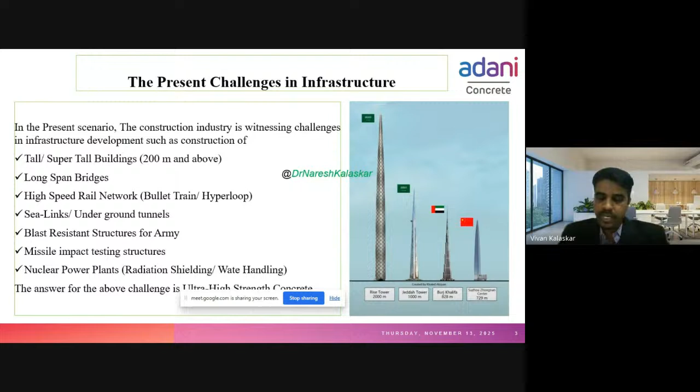So if you see, I'm taking Hyderabad as an example. If you see in Hyderabad, we have reached up to 60-story building construction, super tall building construction we have reached. So this is becoming very common.

If you see in Delhi, if you see in Mumbai, tall and super tall buildings and high span structures and hyperloop and many structures, the infrastructures are throwing a challenge to civil engineers. So for this, we need an exceptional material, which is ultra high performance concrete.

So in this presentation, we are going to discuss about ultra high performance concrete, how to reduce its cost, and how to use the local available materials, and how to make an exceptional concrete which will give excellent durability aspects. So what does UHPC give if you compare with normal concrete?

UHPC is a cementitious composite. It will give enhanced strength. If you see normal concrete, it will give up to M60, M70, M80. But in ultra high performance concrete, from starting M100 to up to M200, we can reach, and long-term durability.

If you compare with normal concrete, UHPC gives exceptional durability aspects. In this presentation, we are also going to discuss about the durability aspects at the end of the presentation. And one of the important properties of UHPC is tensile ductility. It is an excellent tensile ductility material.

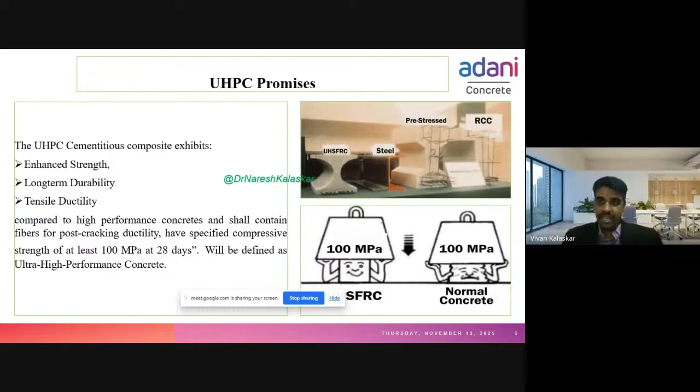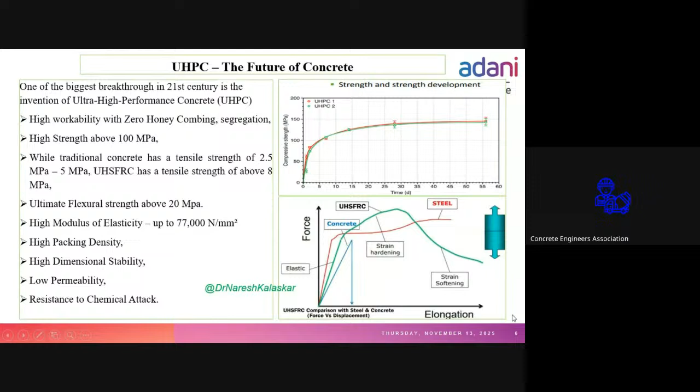Thank you. Okay, the future of concrete. If you see the future of concrete, now we are in 2025 and we are using up to M80 normal concrete. If you see the future of concrete in the 21st century, ultra high performance concrete will be the future, because of high workability with zero honeycombing, there will be no honeycombing and segregation in UHPC.

Minimum compressive strength will be M100. And traditional concrete tensile strength comes around 2.5 to 5 MPa, but in ultra high performance concrete, minimum tensile strength we can get is 8 MPa, and ultimate flexural strength about 20 MPa, and modulus of elasticity 77,000 Newton per square millimeter.

So the main principle of this material is high packing density. If you design the material like that, making perfect packing density and low permeability, you will definitely get an excellent material, and it will also resist chemical attack, which is one of the important durability aspects.

You can see in this graph, we have compared UHPC, normal concrete, and steel. You can see the UHPC comparison with steel and concrete, force versus displacement.

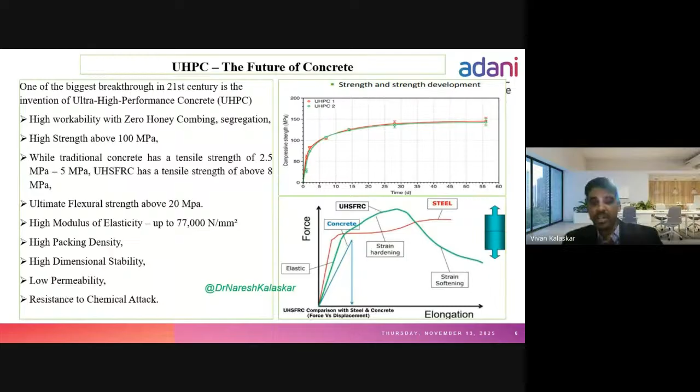Unique features, as I've told, with UHPC we can reduce the overall weight of the structure, and negligible low reinforcement steel, and low maintenance cost, and sleek and elegant looks, and ultra high wear and impact resistance. And we can get within 24 hours up to 60 MPa compressive strength. Within 3 days, we can reach up to 100 MPa compressive strength.

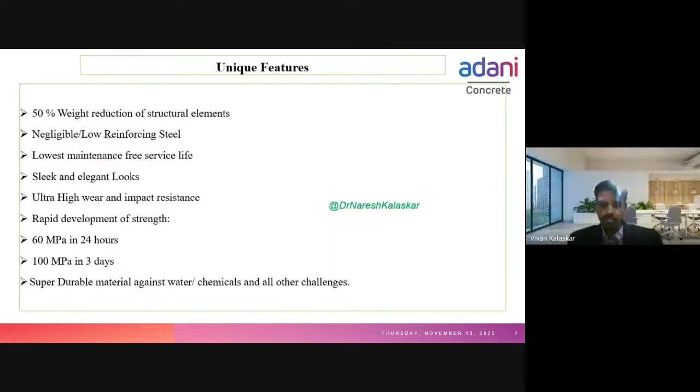The principle of mix combination of UHPC, now I'm sharing with you. There are 4 basic important mixed combination principles. One is in UHPC we have powder and fine materials. Second is superplasticizers. Third is fibers, and fourth is water.

If you take the powders, we are using ordinary Portland cement, quartz sand, fine silica sand, and ultrafine GGBS as the powders. Superplasticizers are very important for ultra high performance concrete, because in normal concrete we used to take a water cement ratio of 0.4 or 0.3, but in UHPC we have to bring down the water cement ratio to up to 0.15. So to get the proper fresh properties of concrete, we need an excellent superplasticizer, which plays a major role in UHPC.

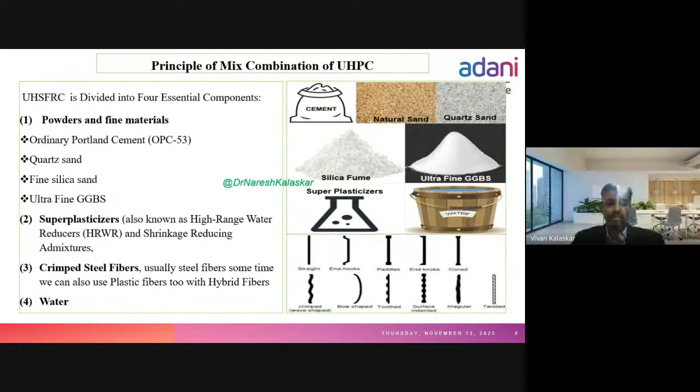Crimped steel fibers are very useful and very important in UHPC, because in this high strength concrete there will be a lot of shrinkage, and crimped steel fibers reduce the shrinkage. It will also improve the flexural behavior. So crimped steel fibers play a major role, and water is also very important to make the mix.

The main principle of UHPC is that there will be no coarse aggregate in the mix. Usually we add 20 mm and 10 mm aggregate in normal concrete, but in the Indian UHPC which we have designed, we have used 2.36 mm as the maximum size of aggregate.

The second principle is higher packing density and no weak layers, and steel fibers, which I told you, improve ductility in UHPC and also reduce shrinkage. These are the main mixed combinations of UHPC.

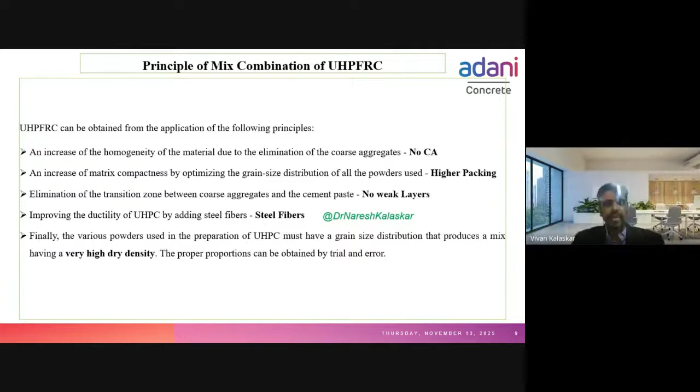The principles of mixed combination of UHPC, of course.

In this UHPC, we are using cement as a binder. If you use more binder, we will face the heat of hydration. So here we are replacing the binder with cementitious materials like silica fume, ultrafine GGBS, and fly ash. These are the options.

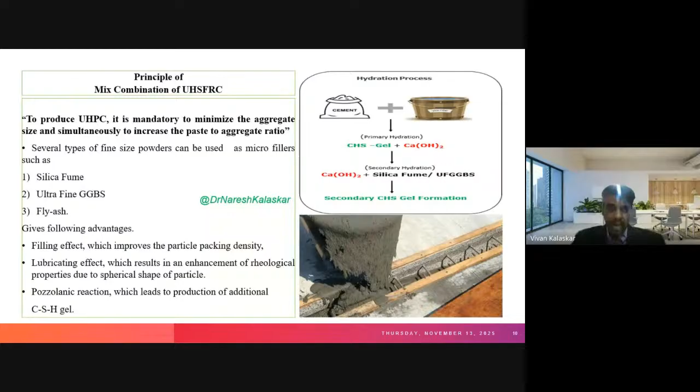If you see the hydration process, when you take ordinary Portland cement, primary hydration will start and 70% of lime will be hydrated with water, and another 30% of lime will not be hydrated. That will be hydrated with cementitious materials.

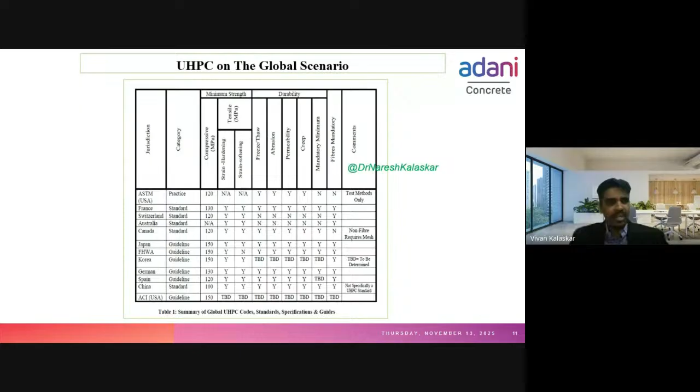If you see the UHPC global scenario, in India we don't have any UHPC code, but in every country they have defined UHPC differently. In China, they have defined UHPC as a minimum compressive strength of 100 MPa. In Canada, they have defined UHPC as 120 MPa minimum compressive strength. If you take the ACI code, they have defined 150 MPa as the minimum strength for UHPC.

In India, we don't have any UHPC code, and we have guidelines only up to M80. That is the reason in this research we have developed UHPC from M80 to M150, to bridge the gap from the Indian standard M80, M90. That's the reason M80 and M90 also we have designed in this total project.

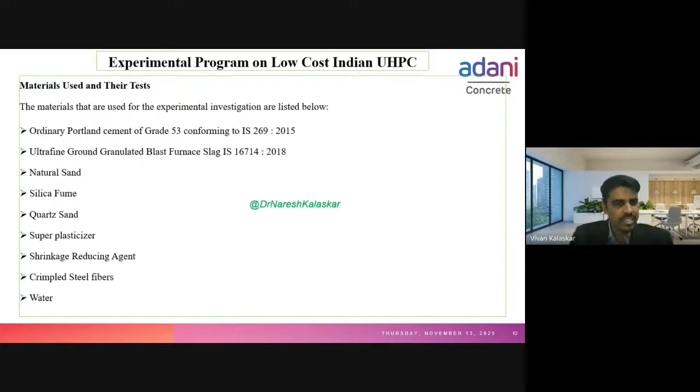These are the materials used in the mix design: ordinary Portland cement, ultrafine ground granulated blast furnace slag, natural sand, silica fume (which has been tested but not used in the concrete), quartz sand, superplasticizers, shrinkage reducing agent, crimped steel fiber, and water.

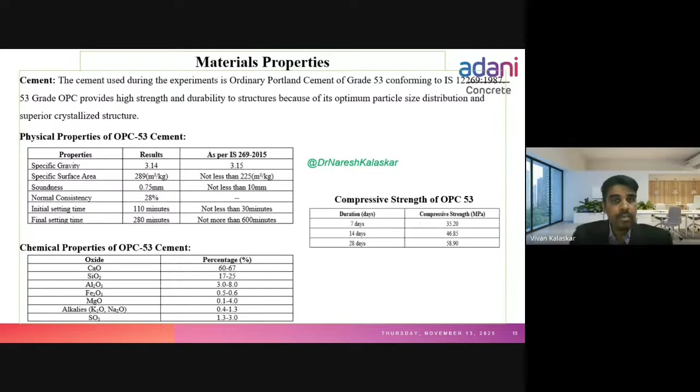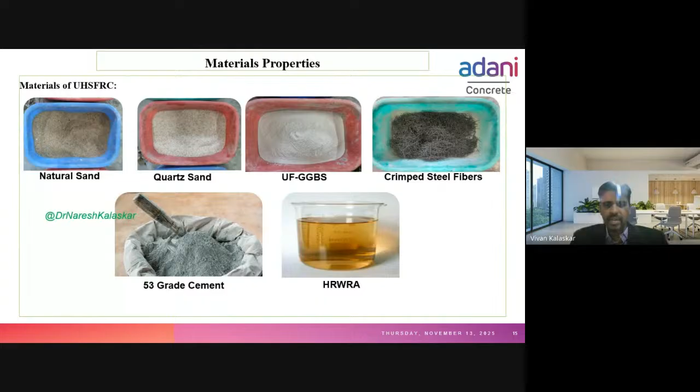Ultrafine GGBS, so we can say Alcofine. In Ambuja, we are manufacturing Alcofine. It's nothing but ultrafine GGBS. These are the properties of ultrafine GGBS.

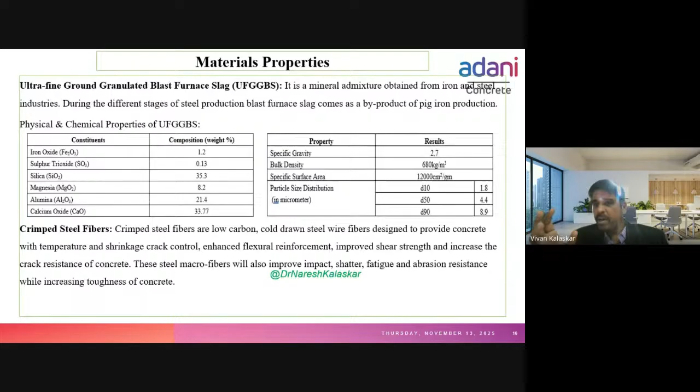You can see the specific surface area, 12,000 centimeters square per gram. It's one of the beautiful things this material has, so that we can reduce more voids. We can improve the packing density, and we can make the concrete more non-porous. Crimped steel fibers.

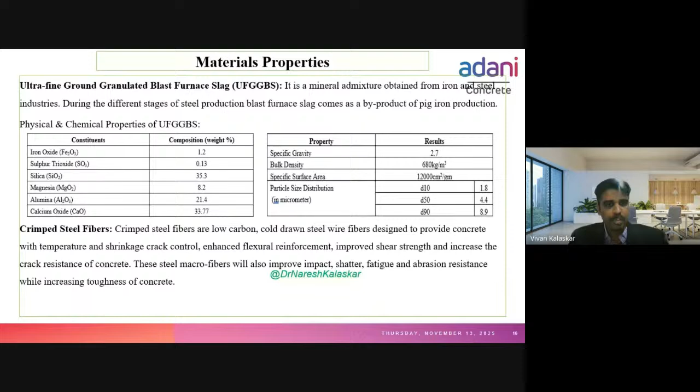The crimped steel fiber density is 7,800 kg per meter cube. The aspect ratio is one of the important points in UHPC for fibers. The aspect ratio used in this design is 42.3. Aspect ratio is nothing but L by D, the length and diameter of the fiber.

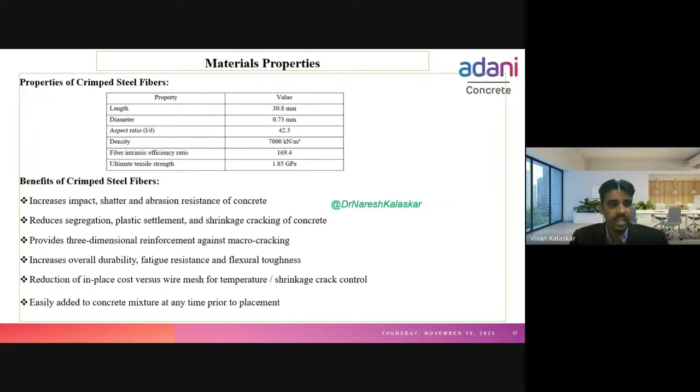Crimped steel fibers definitely reduce shrinkage, improve the flexural behavior, and result in reduction in in-place cost, replacing various wire mesh used for temperature and shrinkage control. These are some important benefits of crimped steel fibers.

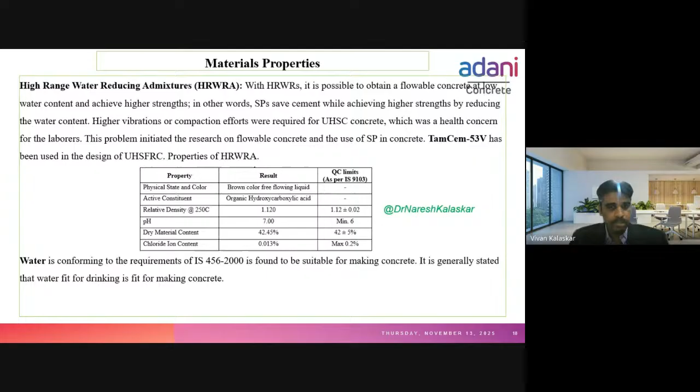High range water reducing agent. We have used TamCem-53V high range water reducing agent. Water as per Indian standard - drinking water we have used.

So is UHPC expensive, or is imported silica fume required in UHPC? Most designs, if you see foreign countries' UHPC designs, use a lot of silica fume. Silica fume is an imported material, and it is very, very expensive. So is it required to design UHPC with silica fume? In the coming slides, we are going to discuss how silica fume behaves when you use more quantity.

We did a small experimental study where we created mortar cubes. In these mortar cubes, we replaced 10% of the cement with ultrafine GGBS, and 10% with silica fume. As you may know how to test mortar cubes per Indian standard - like testing for cement grade with 200 grams of cement and 600 grams of Indian standard sand. We add the cement and test the compressive strength. We did the same study here.

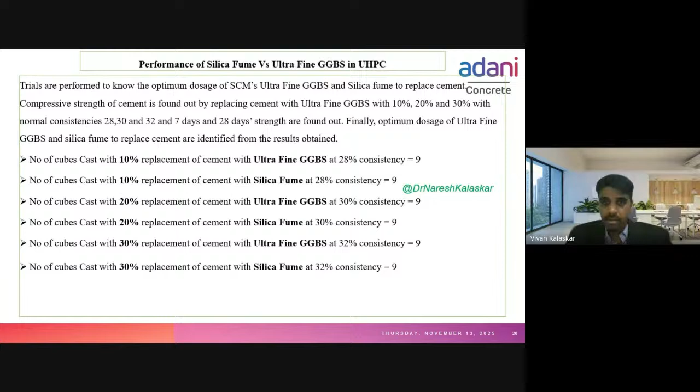We replaced cement with ultrafine GGBS and silica fume at 10%, 20%, and 30%. After mixing, we cast mortar cubes and tested them at 3 days, 7 days, and 28 days. These are the results we got.

When we added 10% silica fume, we got 46 MPa compressive strength. When we increased silica fume to 20%, the 28-day compressive strength drastically dropped to around 16.7 MPa. When we added 30% silica fume, the 28-day compressive strength drastically dropped to 8.5 MPa. So as you increase silica fume content from 10% to 20% to 30%, the strength keeps coming down.

But when using ultrafine GGBS, replacing 10% of cement, you get 59.9 MPa strength. Increasing to 20% ultrafine GGBS, you get 63.04 MPa compressive strength. Replacing 30% of cement with ultrafine GGBS, you get 72.3 MPa compressive strength.

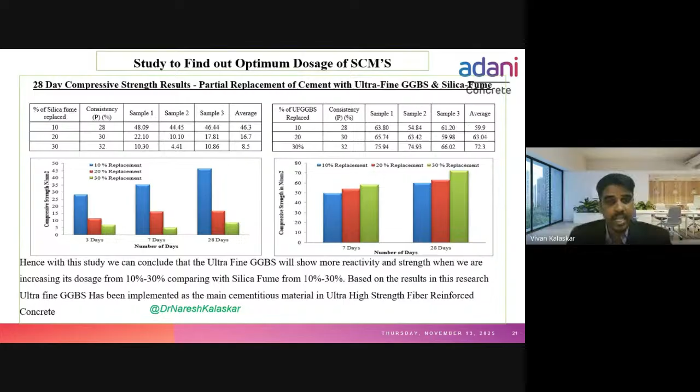So from this study, we can clearly understand that silica fume is not suitable for ultra high performance concrete, and it's also a high-cost imported material. Ultrafine GGBS is abundantly available in India. We can use this material up to 30% in UHPC, reduce the cost, and improve the performance of the mix.

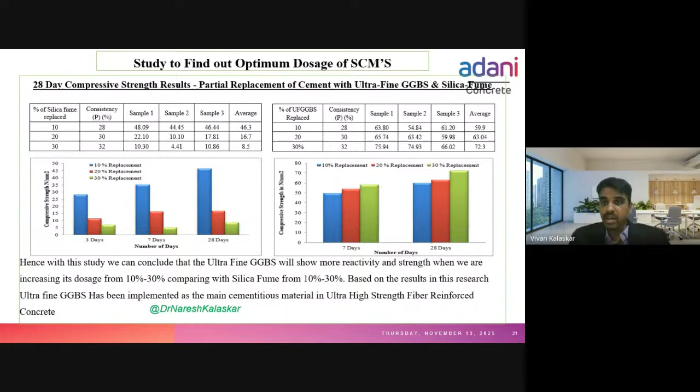When mixing, first you add cement and fine powder material like quartz sand. After that, add the remaining powder material - silica sand and whatever other cementitious materials you have - and mix it in dry condition. After mixing thoroughly in dry condition, add the water, and after adding the total water, mix for 3 minutes.

After mixing for 3 minutes, slowly add the admixture - you should not add it all at once. You have to observe how the mix is behaving as you add the admixture. The total procedure takes 7 to 10 minutes. While adding water simultaneously, you also have to add the steel fibers.

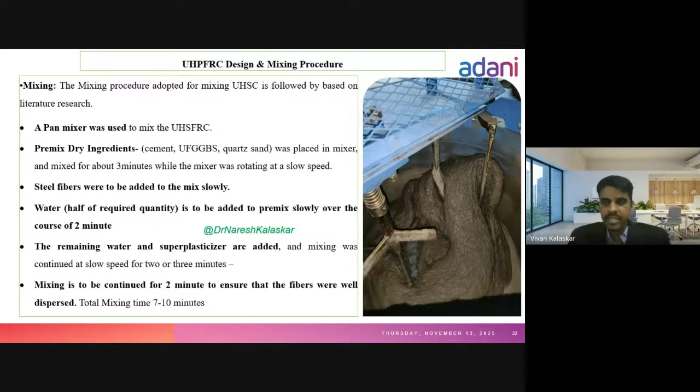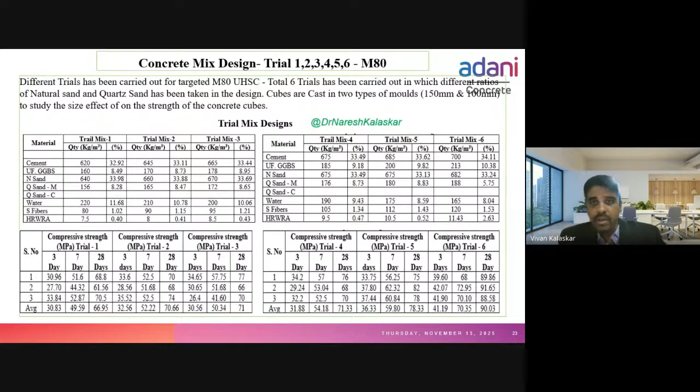So you can see here in this trial mixing, we are same just like we have done a previous experiment. We are increasing.

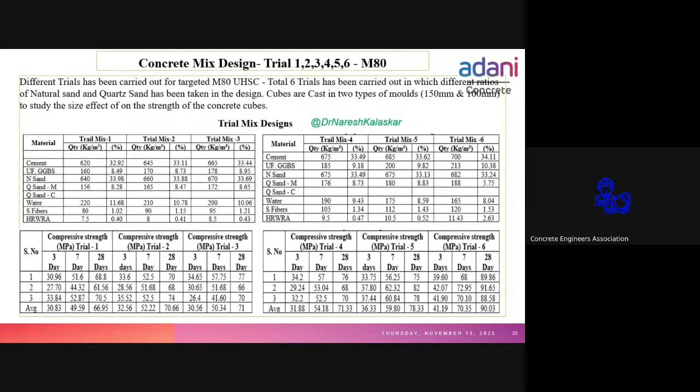आए हैं क्या? ठीक है, मैं आता हूँ फिर आधे घंटे। Mr. Sunil, please keep yourself on mute. के करीब आता हूँ मैं आपके पास। Thank you. Hello.

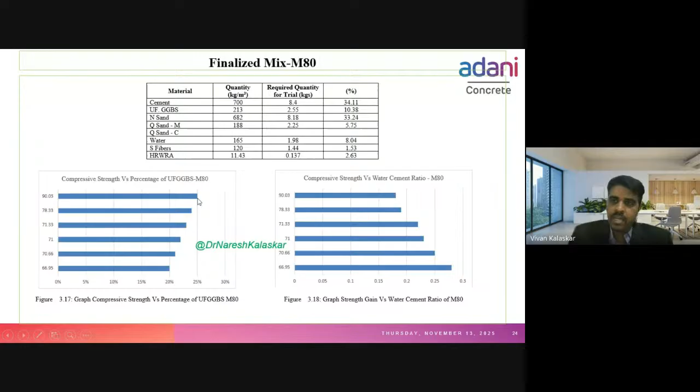If you see the graph trend, when you are increasing the ultrafine GGBS content, your compressive strength is going up. When we used ultrafine GGBS 20%, our compressive strength was 66.95. When using ultrafine GGBS 25%, our compressive strength was 90 MPa. So ultrafine GGBS or alcofine is an excellent cement replacement for UHPC.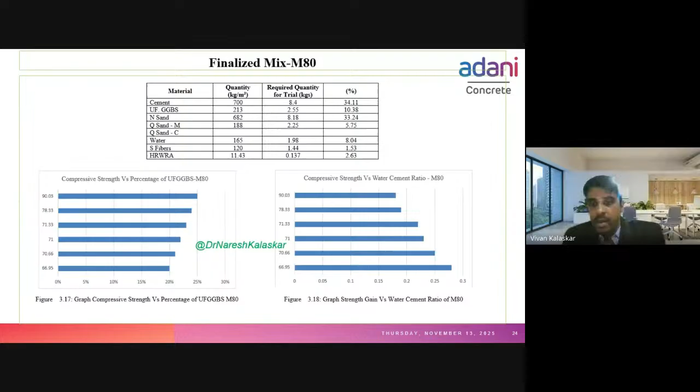This is M80, and you can see the water cement ratio here. When you increase the water cement ratio from 0.28, you got M80 strength of 66.95. When you reduce the water cement ratio, like for M80 we used 0.18 water cement ratio, you got 90 MPa strength.

So in this graph, I want to say that ultrafine GGBS content and water cement ratio matter: when you increase ultrafine GGBS, you get more strength, and when you reduce the water cement ratio, you get more strength. These are very important factors to keep in mind while designing UHPC. So low water, higher good quality binder, and supplementary cementitious materials are important.

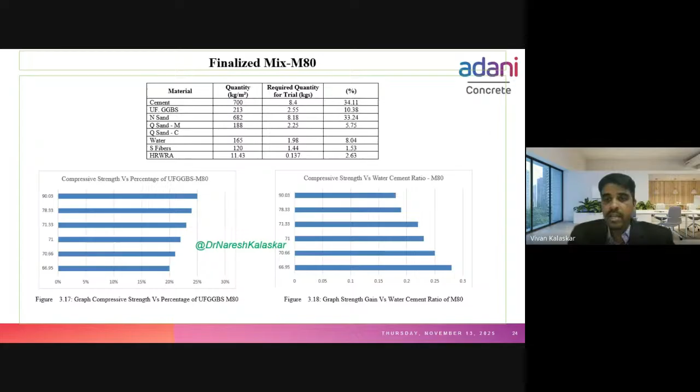As you know, in India, in Indian standard, we have standard deviation specified only up to M80, for normal concrete only. For all higher grade concretes, the code has specified only 5 standard deviation. So for M80, we have also calculated the standard deviation for all these mixes, and we established the standard deviation as 5.56 for M80.

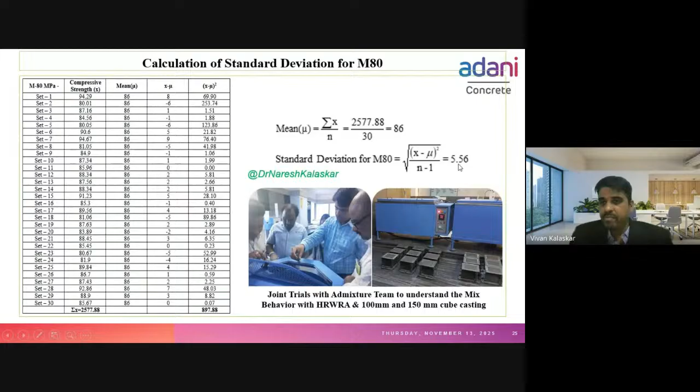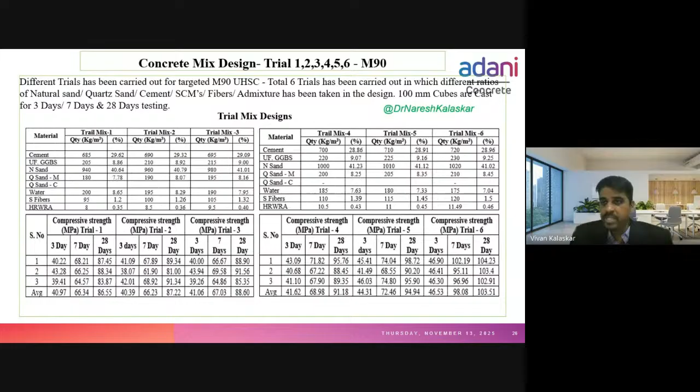This is M100. In M100 also we have used quartz sand and natural sand. In this design, we have reduced the natural sand content and used quartz sand. When we used finer quartz sand, we got 112 MPa compressive strength for M100. The standard deviation established for M100 is 6.12. These standard deviations can be used because we have done extensive trials for these mixes and established these standard deviations - around 30 sets we have tested for each standard deviation calculation.

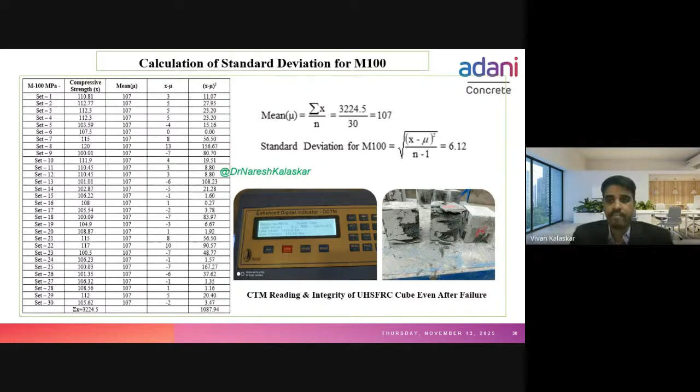This is for M110. The compressive strength has been seen as 122 MPa.

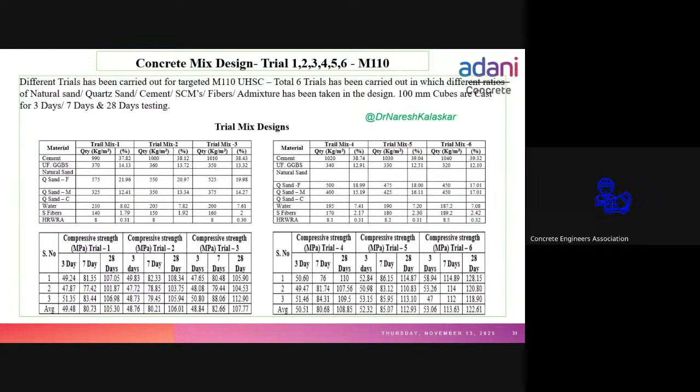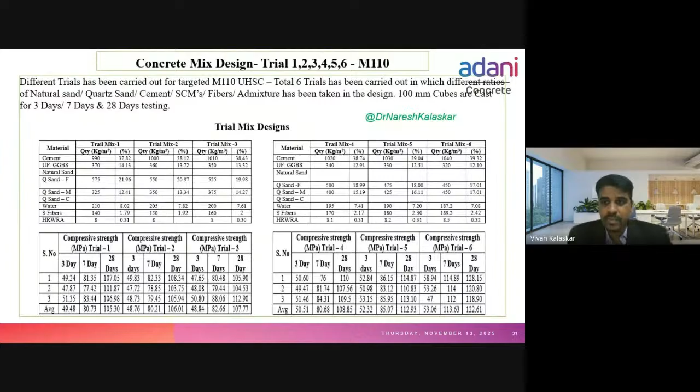In this M110, we have totally omitted natural sand and taken quartz sand - finer quartz sand and medium quartz sand. When we omitted total natural sand and took only quartz sand, we got a compressive strength of 122.61 for M110, and we established a standard deviation for this mix of 6.26.

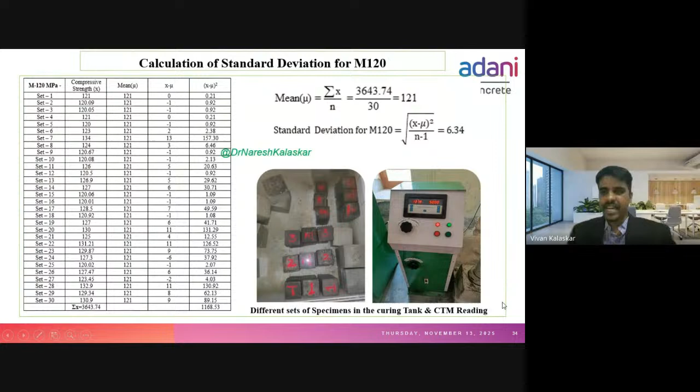This is M120, and the strength has been - you can see here, in the previous mix we used finer quartz sand. In this mix we used medium quartz sand and coarser quartz sand. Finer quartz sand has been omitted, and only medium quartz sand was used. When we used only medium quartz sand and also omitted natural sand, we got 131.66 MPa for M120. The standard deviation for M120 is 6.34.

For M130, we got 142.09 compressive strength. In this mix, medium quartz sand has been used.

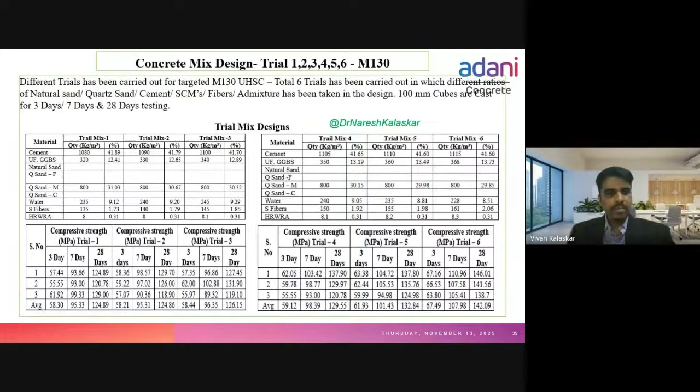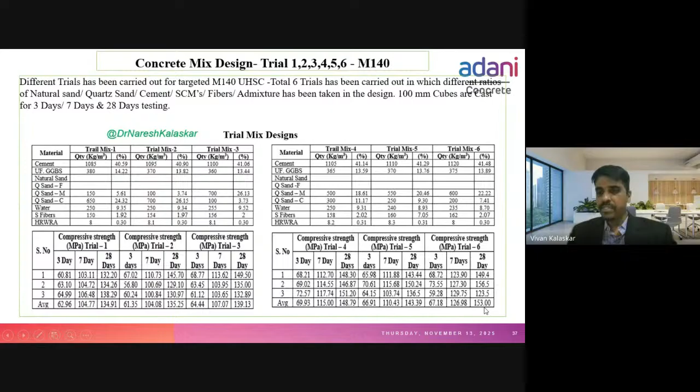When we used this, we got for M140, 153 MPa compressive strength. Are you observing the standard deviation is going up? When the compressive strength increases, automatically the standard deviation also increases. For M140, we got 7.23 standard deviation.

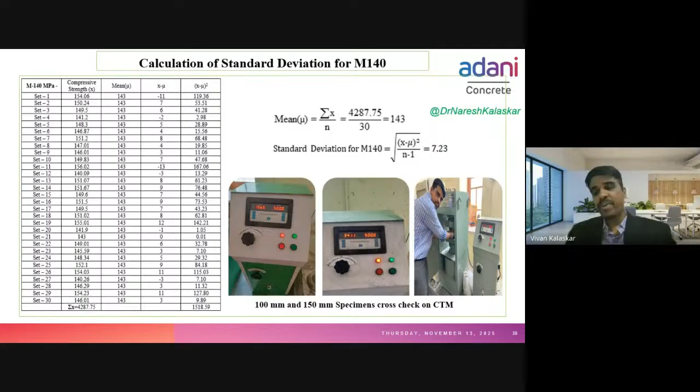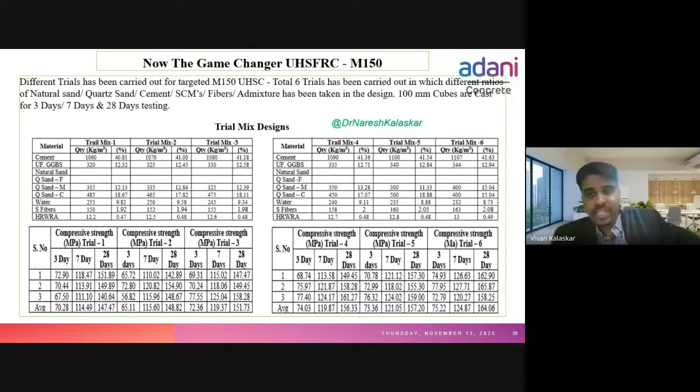This is M150. In M150, we have used medium quartz sand and coarser quartz sand. In trial 6, we have used 50-50% - medium quartz sand 50%, coarser quartz sand 50%. So what is happening here? The coarser quartz sand voids will be filled with medium quartz sand, the medium quartz sand voids will be filled with cement paste, and cement paste voids will be filled with ultrafine GGBS. So when you plan your total density matrix perfectly, then only you can achieve the perfect compressive strength.

In this M150, we got 164.06 compressive strength. So in this study, I have stopped till M150, and next I'm going to explain the M150 standard deviation, which is 7.82.

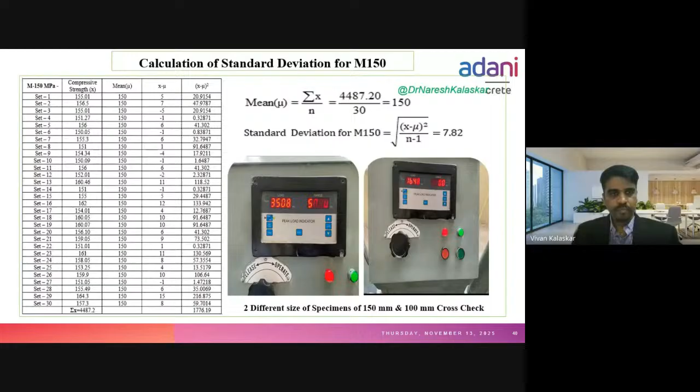Here's a small video of the mix, showing how the fresh properties of this mix look.

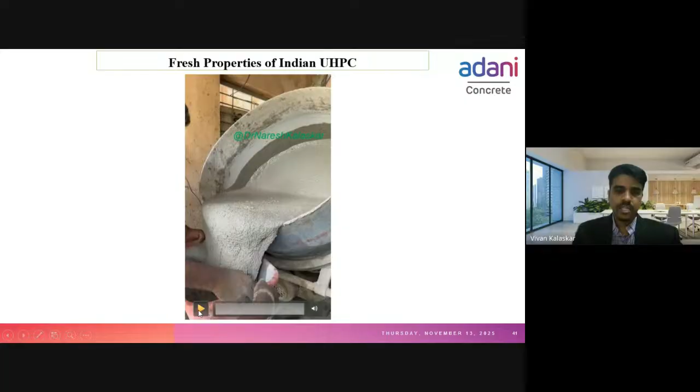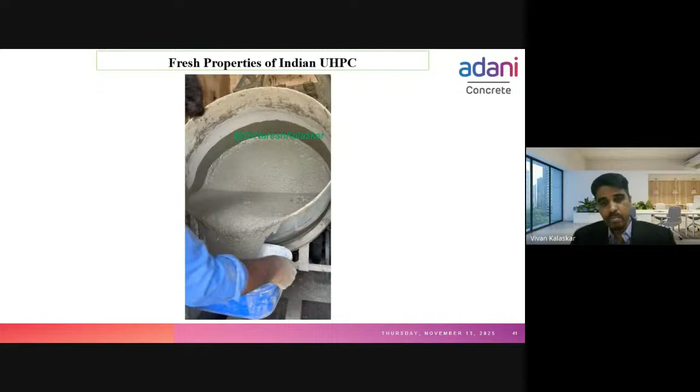Can you imagine what will be the water cement ratio for this? This is M150, water cement ratio is 0.14. At 0.14 water cement ratio, the mix is flowing like anything.

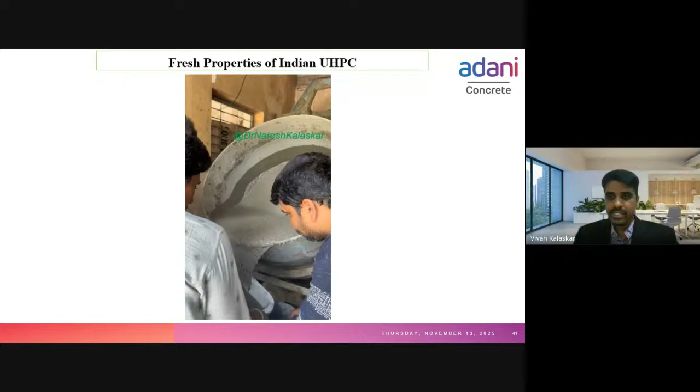We can make it pumpable also, just by correcting the admixture dosages. So usually UHPC will be poured like this only. If we need any pumping requirement, we can change the admixture dosages and get the mix required fresh properties of concrete.

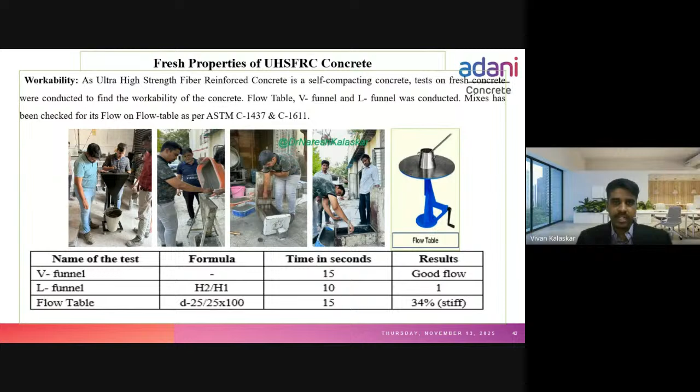These are a few fresh properties of concrete tests we have done - workability test, V funnel test, L funnel test, flow table test. Flow was good, L funnel result was 10 seconds, and flow table was 15 seconds. These are the fresh properties of concrete testing as per ASTM C1437 and C1611.

We have done one more study on this UHPC, because usually in southern India, I did my research in a university laboratory where we only had a 3000 kN compressive testing machine. For testing an M150 cube, we need a minimum 5000 kN machine if you are casting a 150 mm cube.

That is the reason I did one more point - I reduced the cube size. I took 100 mm cubes and also cast 150 mm cubes, and I took external lab support where a 5000 kN machine was available, and I did a study.

What will be the specimen size effect when you are reducing the size of the cube? What will be the effect on compressive strength? This is the study I have done.

So if you see, for the 100 mm cube, for the same mix design, when you reduce the cube size, the strength will increase. But for the same mix design, when you increase the cube size, the strength will be reduced.

With this study, I have established two multiplication factors which can be used in coming research. If you have cast a 150 mm cube of UHPC and want to convert those results into 100 mm, you have to use a multiplication factor of 1.05. Whatever compressive strength you get, multiply it by 1.05 to get the 100 mm cube result.

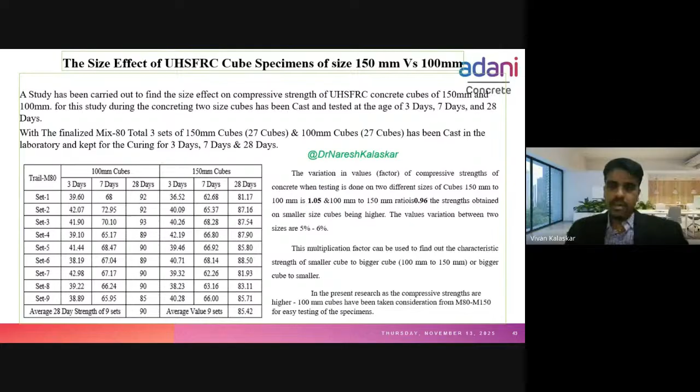If you have cast a 100 mm cube and want to convert it into a 150 mm cube, you have to use a multiplication factor of 0.96. So these are the multiplication factors you can use as per the requirements, and we have checked them against the target mean strength.

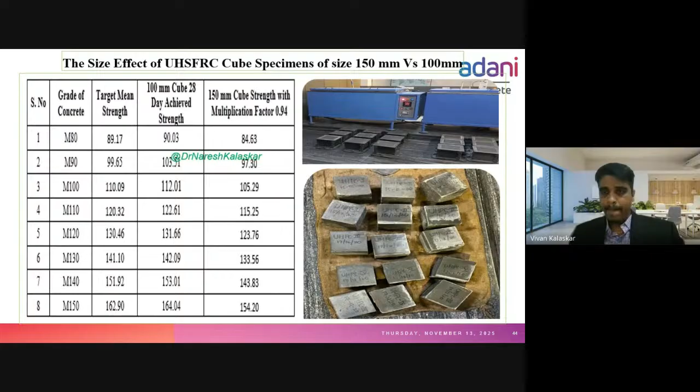Now, splitting tensile strength. A splitting tensile strength study has also been done. Let me explain.

For splitting tensile strength, we have a code formula: 0.398 under root FCK. If you take M80 and multiply with this theoretical formula, 0.398 under root FCK, the splitting tensile strength for a normal concrete will be 3.56 for M80. With this UHPC, we did a splitting tensile strength test and got 5.33.

If you take M150, splitting tensile strength as per the code formula gives 4.87, but we got 9.8 splitting tensile strength for M150.

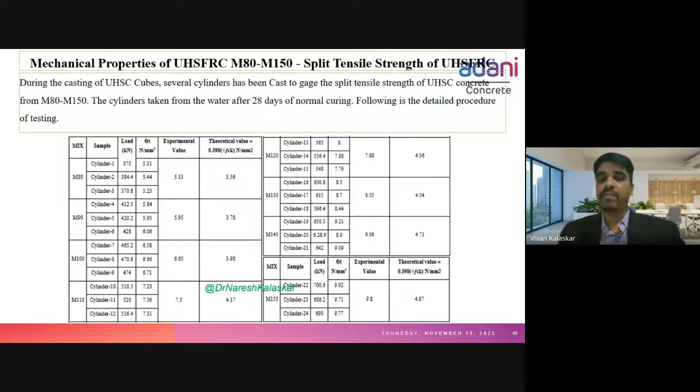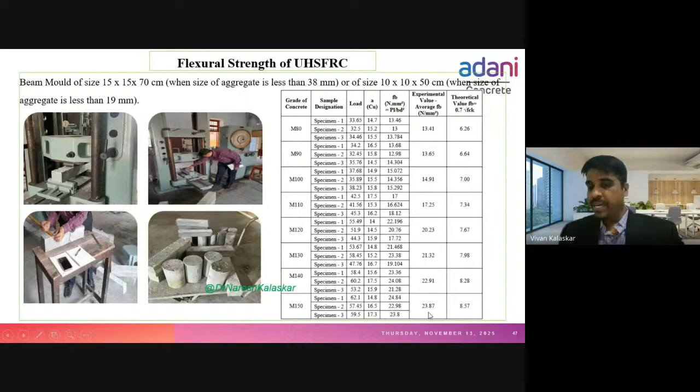This is the flexural strength we checked for UHPC on the Universal Testing Machine. For M80, as per code formula 0.7 under root FCK, the value should be 6.26, but we got 13.41. For M150, the code specified formula gives 8.57 flexural strength, but we got 23.87, which we can say is 24 MPa. So we can see the flexural behavior of ultra high performance concrete when comparing with code values.

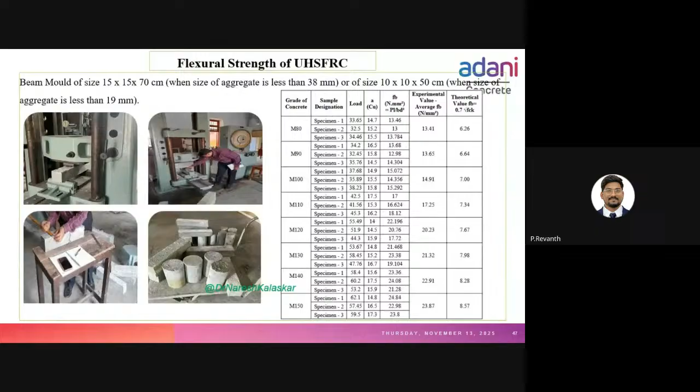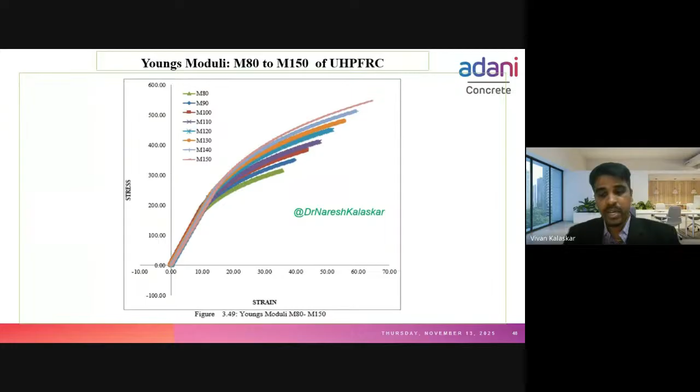Young's modulus is one of the important parameters for concrete. We have also tested Young's modulus, where we got 77 GPa for M150 concrete.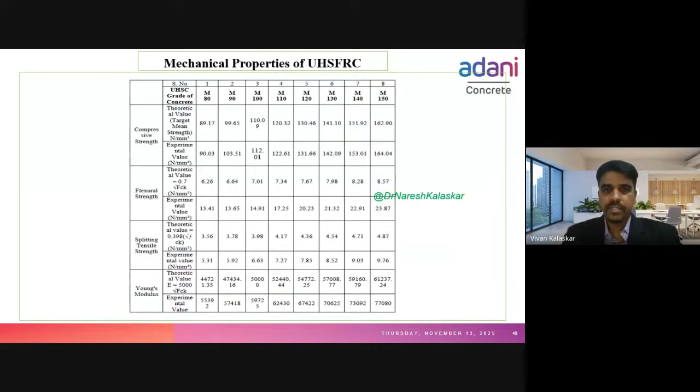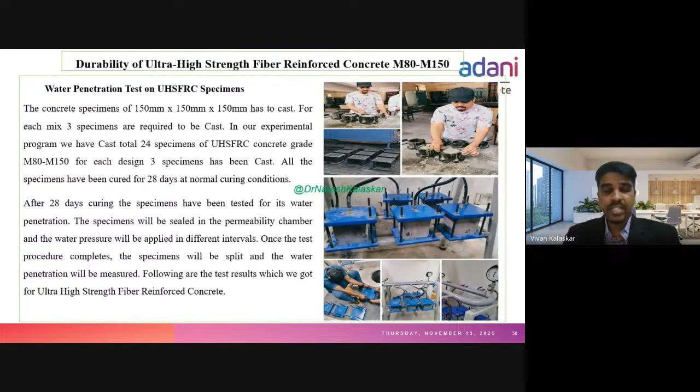These are the durability tests. I performed durability tests like water penetration test and chloride ion penetration test on UHPC specimens, and you will be surprised by the results. M150 has water penetration of 1 mm. As per IS code 16700:2017, foundation maximum water penetration should not exceed 15 mm, and for superstructures it should not exceed 20 mm. So for M150, we got only 1 mm water penetration.

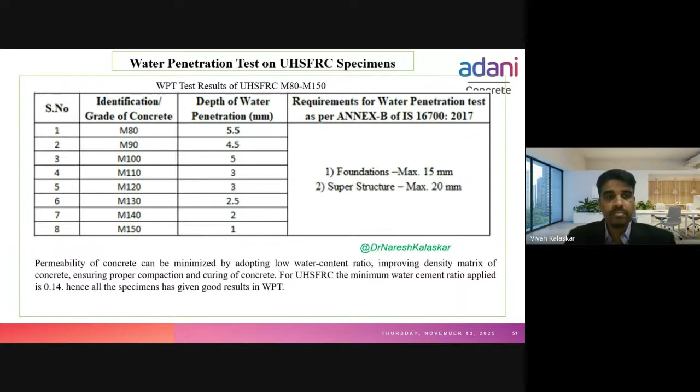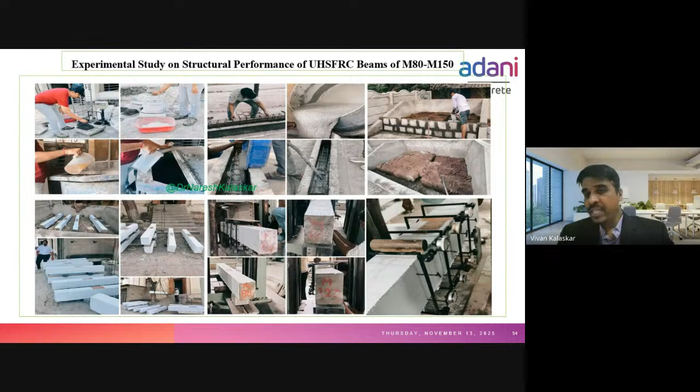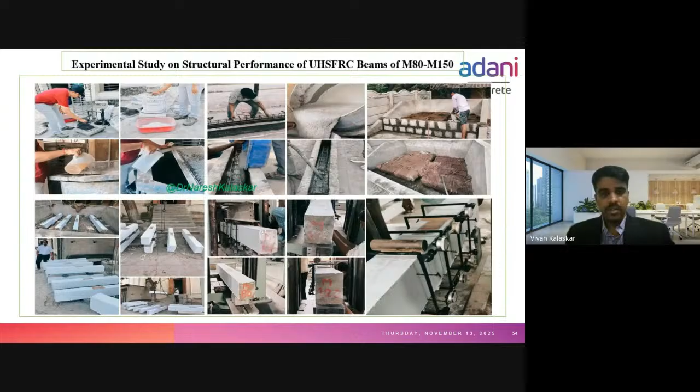One exceptional and good design parameter of this concrete is that usually UHPC requires heat curing or thermal curing, but we have cured all these specimens in normal curing at 27 degrees plus or minus 2 temperature. So for curing also you need not require any special setup. You can manufacture your concrete and cure it as per your site condition and still get UHPC results. Gunny bags were used to maintain the moisture.

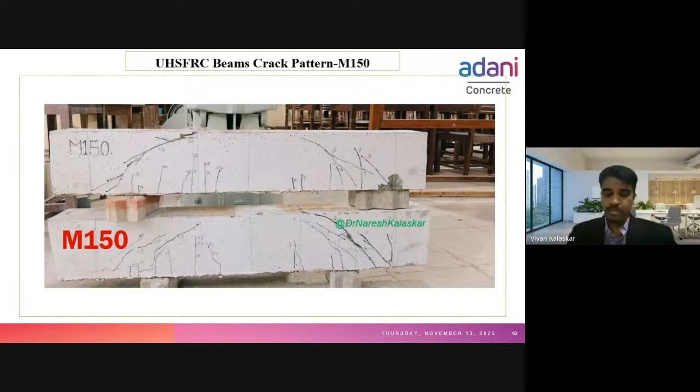These are few photographs of beams which we have tested for M80, M90, M100, 110, 120, 130, 140, and 150. Details about this study will come in the next presentation, because it will take a minimum of 1 hour for this topic.

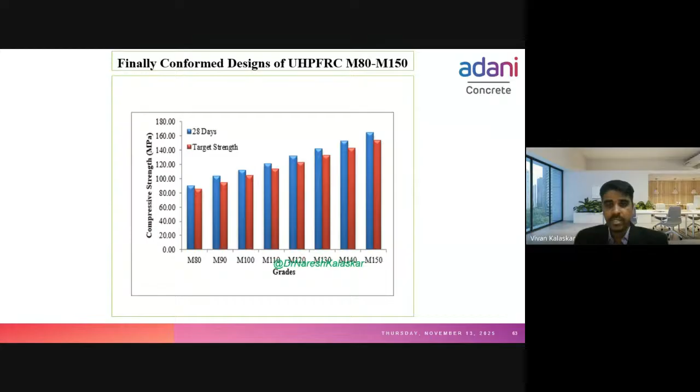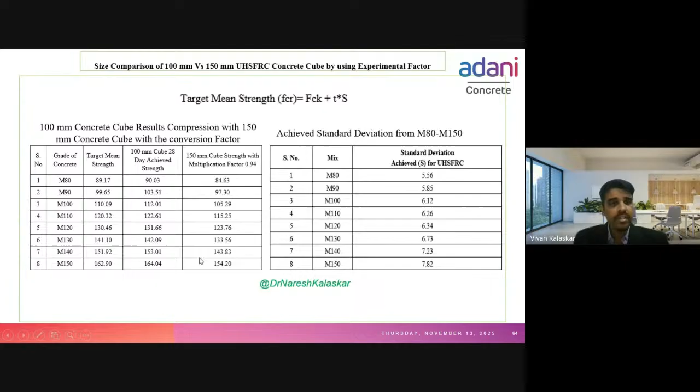So finally, confirmed designs when compared with the target mean strength, all designs from M80 to M150 with local materials have crossed the target mean strength, and all specimens have shown exceptional results in mechanical properties, durability aspects, and fresh properties also. These are the target mean strength and standard deviation achieved from M80 to M150. The standard deviation has been established, and these are the size effect factors.

This cost can be reduced further by optimizing the binder content in the mix design, which needs extensive trials.

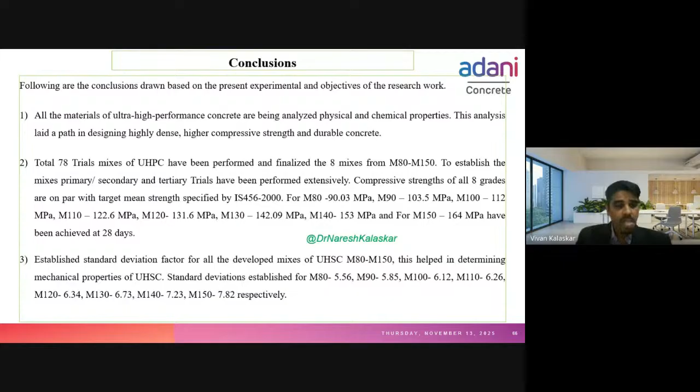The developed concrete has given exceptional results for flexural behavior, splitting tensile strength, and excellent Young's modulus. One surprising thing: the beam designed with M150 has taken 60 tons of load in flexure. This is one of the breakthroughs we have seen in this design.

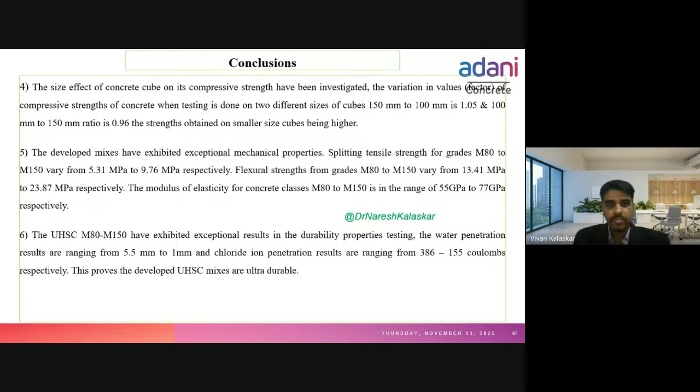And for durability properties also, we got 1 mm penetration water levels and 386 to 155 coulombs of chloride penetration. The cost has been reduced up to 70%.

How it has been reduced, we are going to explain. How we made Indian UHPC cost effective: no imported materials in the mix, so there is no silica fume in the mix. Higher percentage of binder replaced with supplementary cementitious material, so binder content has been replaced with alcofine or ultrafine GGBS. We have not implemented any heat curing, and we have designed the perfect packing density by using 3 types of sand: quartz sand fine, quartz sand medium, and quartz sand coarse. With this perfect packing density we got this compressive strength, and no special mixing facility was required.

Usually all these parameters increase the cost of UHPC, but in all these parameters we have reduced the cost, and we can reduce this Indian UHPC cost even more.

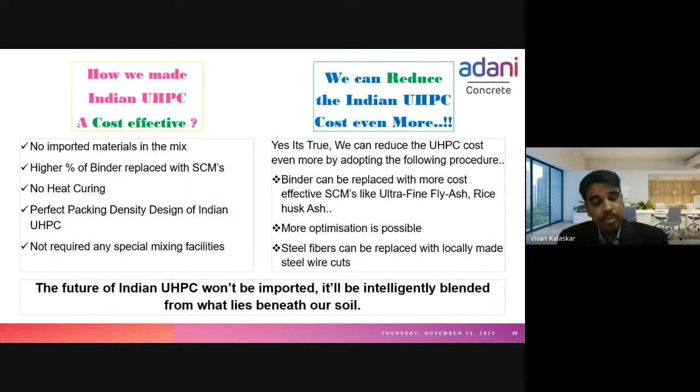Yes, it's true, we can reduce the UHPC cost even more by adopting the following procedures. Binder can be replaced with more cost-effective SCMs like ultrafine fly ash. Recently we are getting ultrafine fly ash also, which is an excellent material. Comparing with ultrafine GGBS, when using ultrafine fly ash, cement has to be replaced with ultrafine GGBS, and some percentage of ultrafine GGBS has to be replaced with ultrafine fly ash, so that you can reduce the cost more.

Rice husk ash also can be used, and more optimization is possible. We can reduce the cement content more by using more trials and developing a few more mix designs. Steel fibers can be replaced with locally made steel wires cut to be used as steel fibers. All these parameters will be very helpful in reducing the overall cost of ultra high performance concrete.

The future of Indian UHPC won't be imported. It will be intelligently blended from what lies beneath our soil.

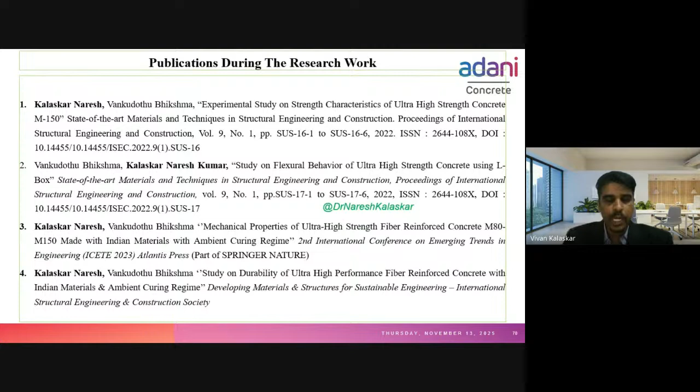These are the publications which we have done on this work. In the International Structural Engineering Conference in Germany, we have presented 2 papers, and in national conferences also we have published several papers. These are all Scopus indexed papers. These are the references.